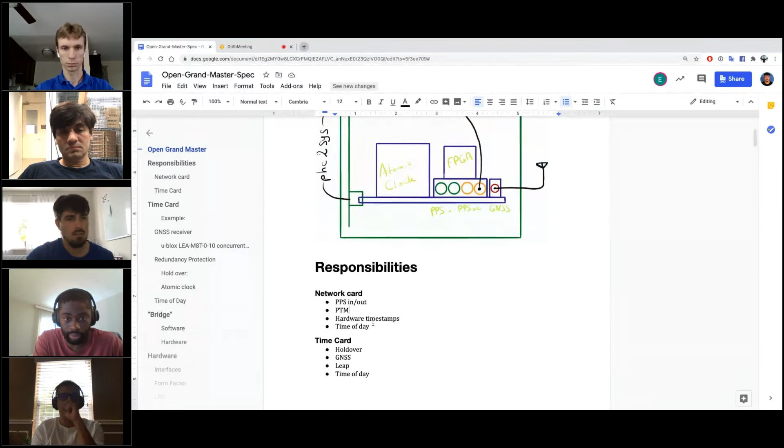Because it's connected with PCI Express, it exposes itself as the hardware PHC clock, so it will provide time of day. Usually it's /dev/ptp0, for example, on Linux, and you can read time of day easily from it. On the time card side, it must perform a holdover. That's why, for example, here is an atomic clock. It has a GNSS receiver to get time.

It has an FPGA to handle basically being a bridge between the GNSS and atomic clock, and perform some functions like leap second not smearing, but propagating. And it should also expose itself like a PHC. So it should have an interface to get and maybe even set time of day externally through open source utils.

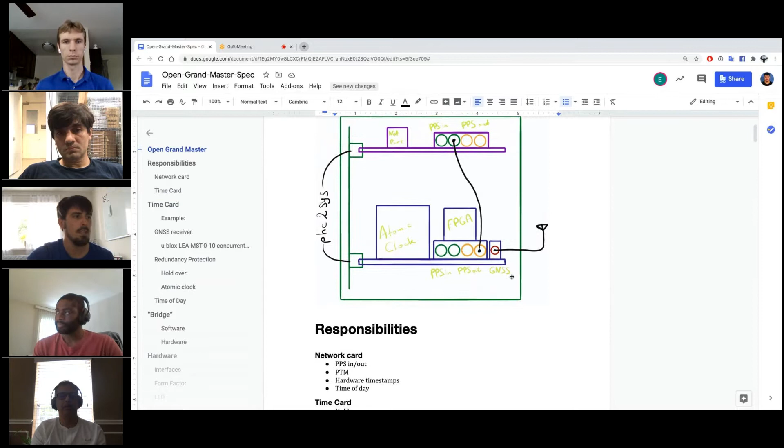Okay, so now we more or less figure out a general picture of how it looks from outside. The idea is that this setup is easily buildable. My favorite example is a researcher in Siberia. If this researcher doesn't have money to buy a very good, expensive network card, for example, which doesn't have a PPS in, they still can enjoy open source tools like phc2sys to copy data from the time card to the network card.

There is open source software which handles this, and they still enjoy not extremely precise, but pretty good precision. Which is fine for research purposes, maybe for development of software, for many other markets. So basically a long tail of markets will be covered just by using the software copying of the clock.

And if you want extreme precision, like we do, you just have an extra cable which leads the PPS output of the time card to the PPS input of the network card, and this brings the precision to crazy numbers, and we expect them to be less than 100 nanoseconds.

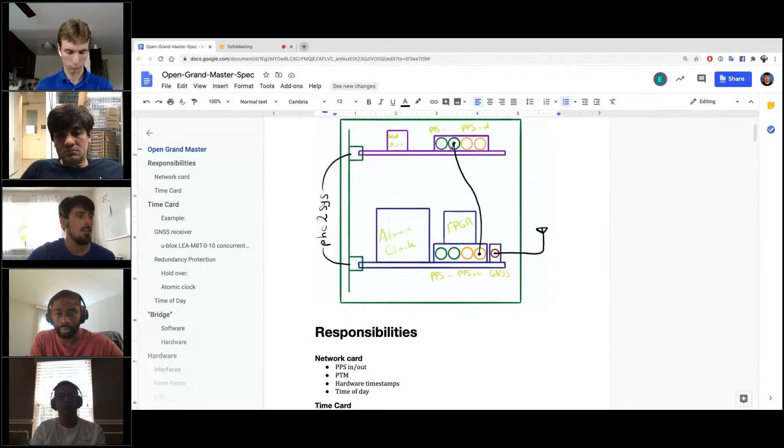So we went through responsibilities. Then we go a bit deeper into the specification. As I mentioned already, the time card itself should expose itself as /dev/ptp-something. There should be open source tools like ptp4l easily working and accessing this information.

And additionally, this should provide precision of less than 1 microsecond. And if we want extreme precision, we plug 1 PPS and it gives under 100 nanosecond precision. In our experiment, it's actually single or maybe double digits of nanoseconds in the worst case. So, right. This is about the time card.

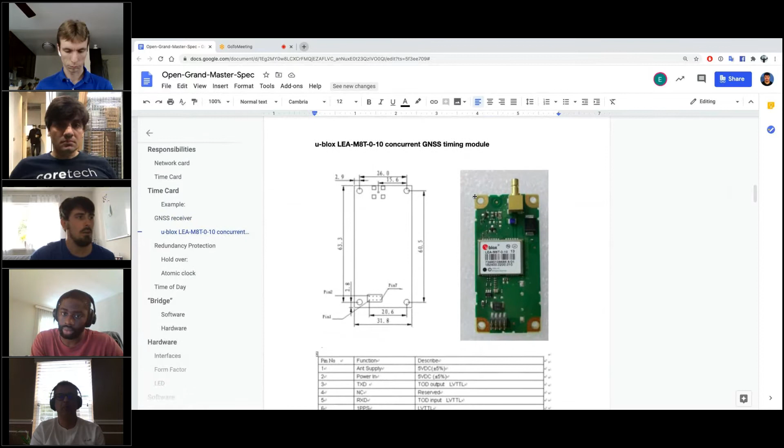One of the inspirational examples might be the card from Microsemi, which they were selling a long time ago, but it doesn't have many features which we discussed right now, so that's why we cannot use it. Obviously the GNSS receiver could be just purchased anywhere. It's u-blox, nothing super special about this. It should just provide several interfaces, like time of day, 1 PPS, etc.

And for the holdover, there will be an atomic clock or any other substitution, maybe even a very good temperature compensated OCXO, so it should be fairly pluggable. It should be abstract, we should have abstraction from it. And the bridge I mentioned could be built in multiple ways. It could be a so-called software bridge, where the software does the job. Then it requires GPSD, etc.

This is like a just-in-case approach. We don't want to go with it and don't want to spend too much time on it. We're thinking about a hardware approach, so a hardware bridge between the atomic clock and GNSS. So our sketches look more or less like this.

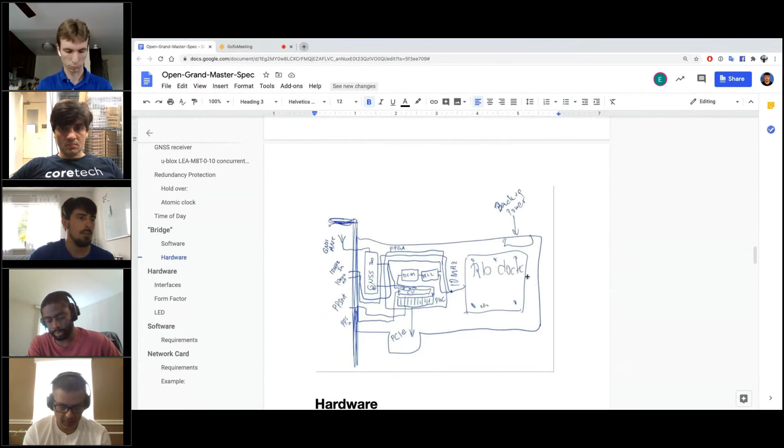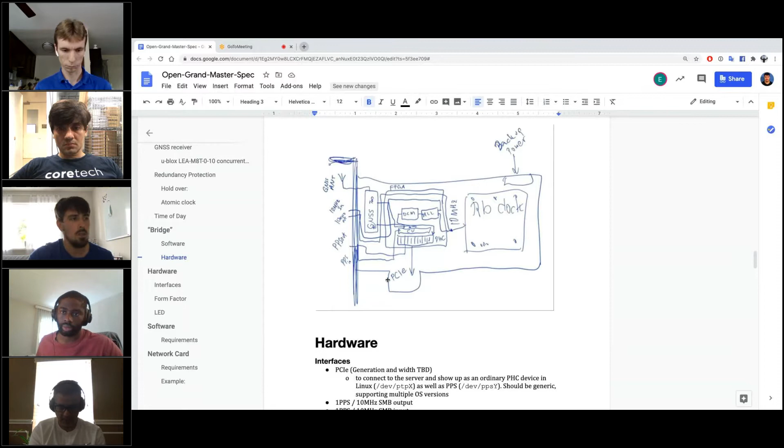We have some metaphorical PCI Express card with some outputs and inputs. Then you have a rubidium clock, for instance. There is an FPGA. You plug it in. And this is basically an add-on to have really great precision. So there are some interfaces described here.

In our case, we go with PCI Express, PPS in and out, SMB connectors, GNSS antenna, and if we merge functionalities of the network card, it might actually have a network port as an optional add-on. Right, so it should have LEDs to signal the status on it, obviously.

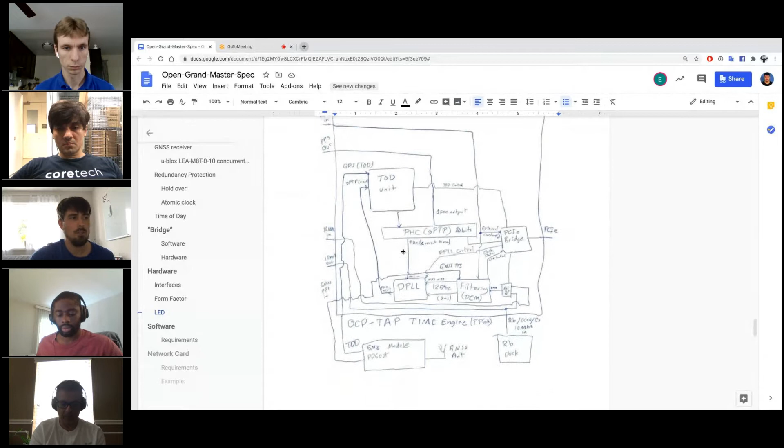And yeah, this is a deeper dive into how the FPGA works. I don't want to stop too much on this at this moment. Right, so the software running on the server, which will facilitate everything working as expected, should be a standard Linux or Unix-like descendant of Unix operating system.

It should be visible, so there has to be a small driver, something very generic, which can expose the registers of the time card and map them as a PTP device, and PPS as well. And this is very small. The need for it is because there are custom registers depending on what FPGA is used, so you have to have those registers written somewhere.

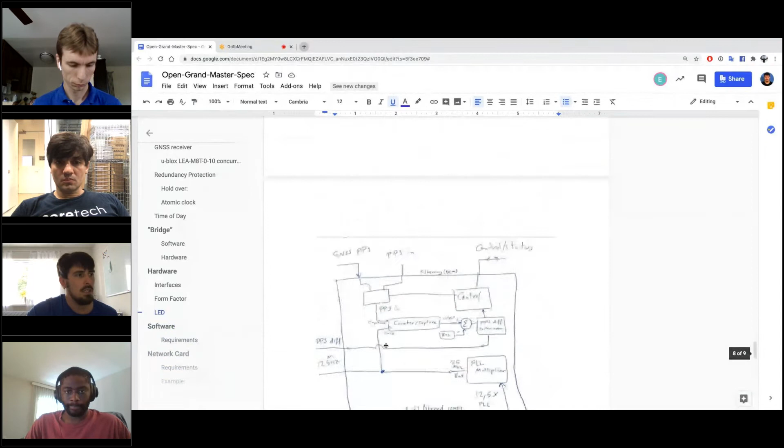So PTP4L is running, and it's using features of the network card like hardware timestamping, etc. For NTP, Chrony can be used, for example, which also can read the PTP device to become the NTP server. And the network card's requirements we already mentioned. We work closely with NVIDIA and Mellanox, so we are talking in this case about ConnectX-6 network cards. Right, so with this I can give a word to Dotan, who can tell a bit more about the network card component of this setup.

Hi, if you can leave the slide on, I'm going to talk about this slide. Oh, okay, sorry.

So I want to explain another huge motivation that we see with that open design. Essentially our goal and aspiration is to introduce time sync service into a data center, to make it commodity, to make it easy to use. Oleg mentioned his friend in Siberia, and we all have friends. Time sync is not something that is easy to deploy in data centers. It requires all the operational infrastructure to be cooperative.

Now, when it comes to the Grandmaster, this Grandmaster contains networking functionality, it contains accuracy functionality, and it contains what is hidden inside the PTP profiles, which is industry specification for packet format, for specific points of accuracy and cost, etc. And with that design, we divide those three components, and we just ride on the commercial trains that go as fast as they can.

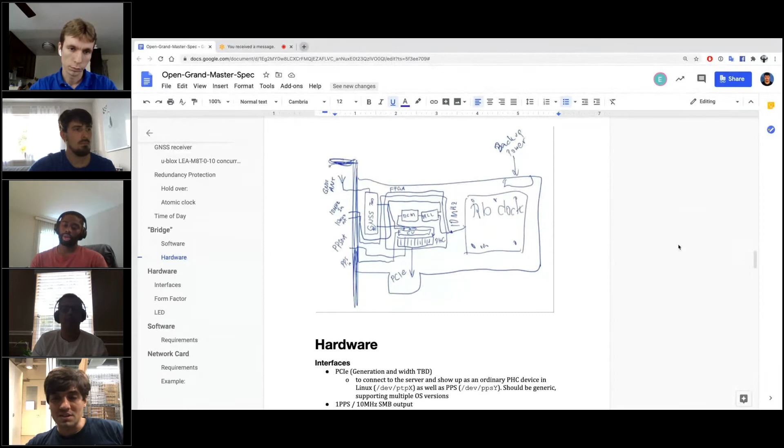We're just giving a suggestion, where basically the FPGA is acting as a bridge to communicate via PCI Express. You have GNSS and a rubidium clock on two sides, and then you have the 10 megahertz input/output and the PPS input/output. Both can be presented on the front of the card with an SMA connector, or with an IPX connector on the board if you want to keep everything inside the board. Let's scroll a little bit down.

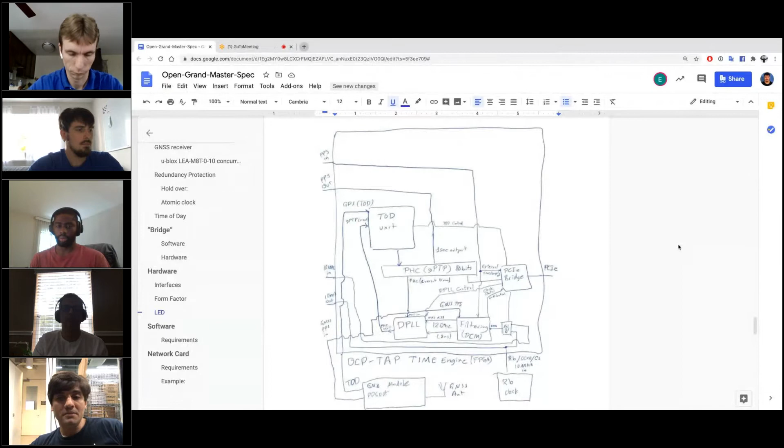In terms of the overall block diagram of what we're going to have in the FPGA, we're thinking pretty simple. We have the bridge showing up here. You have a PHC with a gPTP protocol, 80 bits, and then you have the DPLL. For example, we're talking with some other colleagues about externally creating the PLL with a VCO, feeding the VCO with a high precision DAC, and feeding that back in.

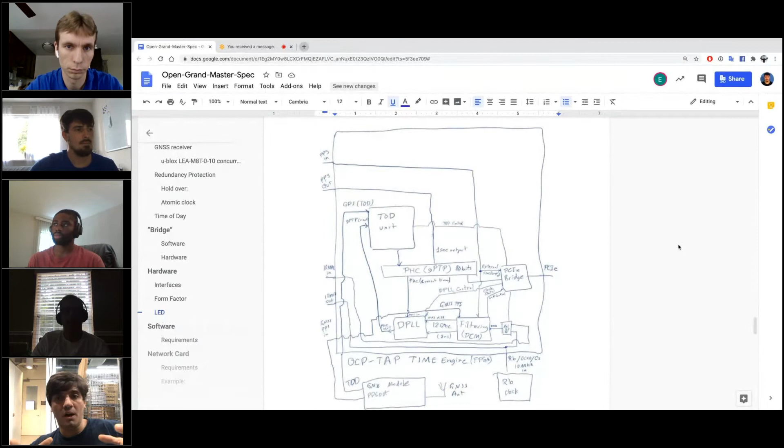This is just a suggestion, and for this quote unquote suggestion, at the same time as we develop the hardware, the FPGA code, IPs and everything, we'll also develop the PCB for it. We'll have the BOM and the schematic available as we go through. And then let's go next.

So basically what it boils down to is you have the atomic clock or OCXO, or a cesium clock or hydrogen maser, whatever you have. You feed that in, and you have your counter running the beats with your atomic clock, and you're taking snapshots from the GNSS that you get in. Then you see how far they are from a second, and you use this to tweak your VCO or PLL. This is called disciplining your oscillator.

Once your GNSS or GPS is gone, you can heavily rely on your atomic clock that you already disciplined in the presence of GPS, and continue on. You can provide all sorts of control schemes, more aggressive or soft, depending on the application. If an application needs more reliability, just add another PPS input or another GPS GNSS receiver, and now you have redundancy. You can add a second atomic clock for redundancy on that side.

For all these ideas, we want to have something that you can either tweak, or more like off-the-shelf hardware you can take and continue from there. I'll leave it to you to continue. Yeah, that actually summarizes it very well. Right.

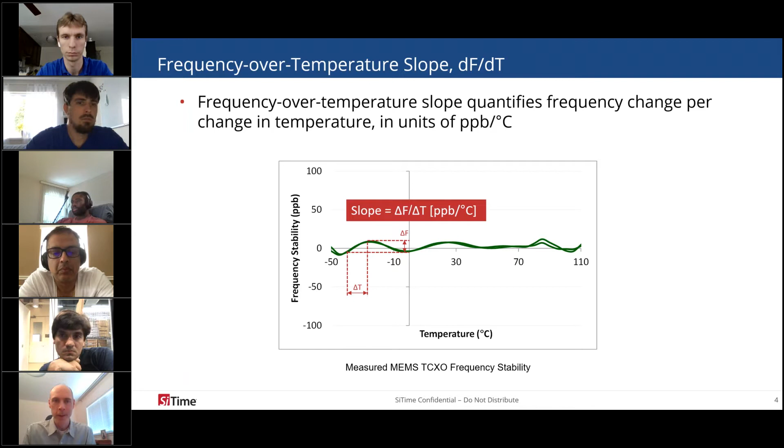An ideal curve would be a horizontal line centered at 0 on the y-axis, meaning that the output frequency doesn't change with temperature. But in practice, of course, DFDT is not 0. And when evaluating a precision oscillator, the most advertised specification is frequency over temperature stability in units of ppm. People sometimes just refer to that as stability because it's so common. For example, people will talk about a 1 ppm oscillator or a 0.5 ppm or 100 ppb. This is the frequency over temperature stability, and it's the first thing people typically think of when selecting a precision oscillator.

However, because in PTP applications the local oscillator is disciplined to the network timing, any frequency changes in the oscillator that are slower than the servo's update rate get filtered by the servo loop, because the oscillator is high pass filtered. Thus, an oscillator's frequency over temperature spec, which is guaranteed over the lifetime of the oscillator, isn't really a critical parameter here. What is critical is the short-term stability resulting from changes in temperature. And by short-term, I mean the time between servo loop updates,

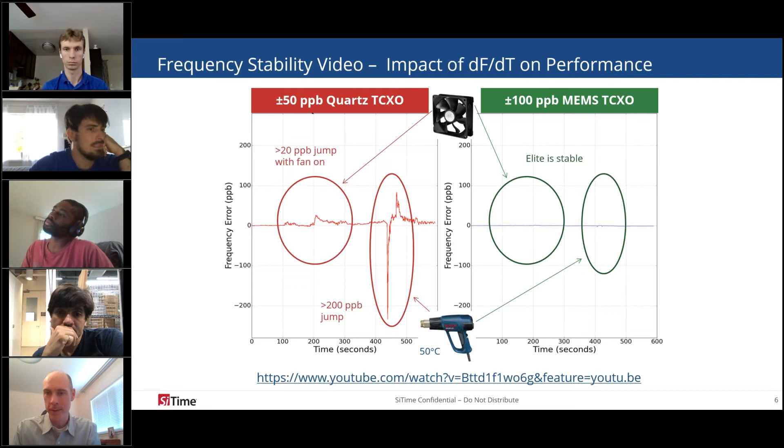But in the interest of time, I'm going to skip this video in favor of a different video that creates a PTP network with 2 slave clocks locked to the same upstream PTP master and plots the time error resulting from changes in their thermal environments. The principles are exactly the same as the last slide, but I'm just going to show this video here because it's within the context of PTP time error.

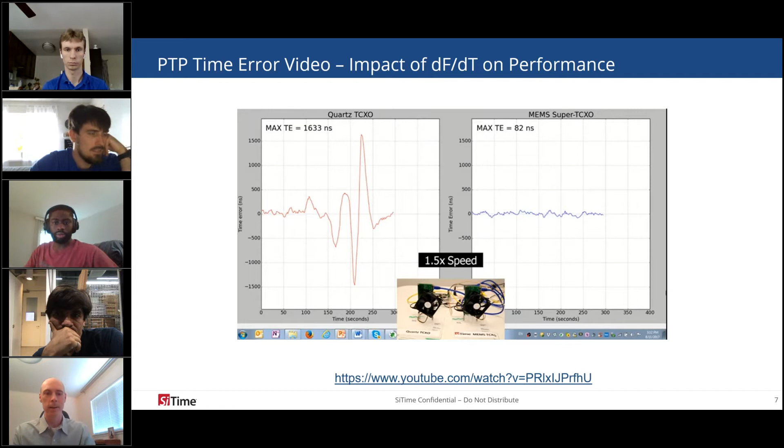Gary, if you can go back to slides. Okay.

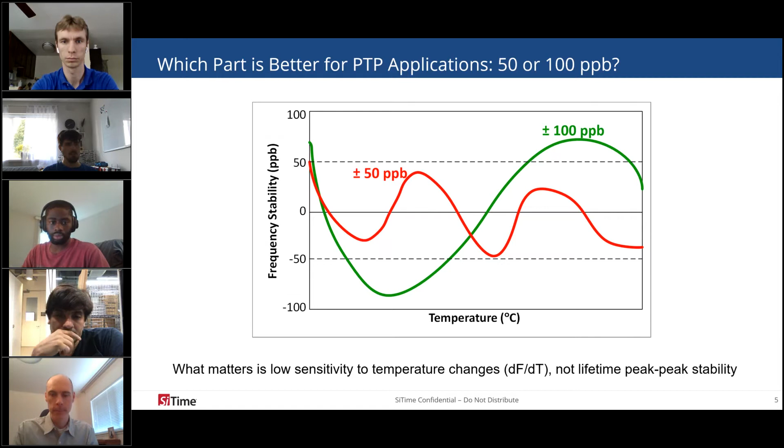This one? Yeah, so actually you're presenting here the one with the fan, with the blower, this one here. So it might seem like a weird situation where you come with a blower and change the temperature, but in data centers, this is an actual event. When an operational engineer opens the rack for maintenance, the temperature goes up. It's not similar to climate change, which happens slowly. Data centers do have spikes.

And by the way, oscillators do respond to acoustic noise as well. I have often seen controlled oscillators that were affected by just the noise created by a fan. Yeah, vibration can also have an impact, although I'm not talking about it specifically here, but yes, vibration as well. Yeah, we've seen cases where some of the racks have a baffle in the front, and that'll impact the way that the temperature flows through the rest of the chassis and create kind of strange effects.

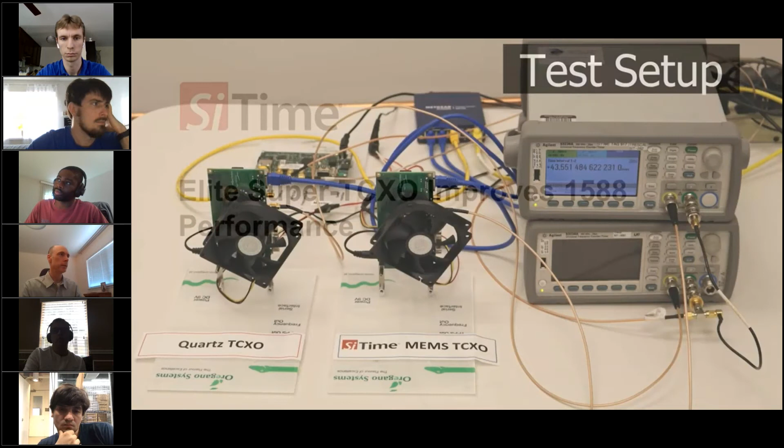Was there any other comment you wanted to make on that? Should I show the video next? Yes. Okay. So let me go ahead and show that. This is a very short video. I think you can see it. Let me know if not. I'm going to start it. It's at an advanced speed here. So let me start again so I can sort of narrate it.

So this is looking at our TCXO performance for 1588, and the first thing is that we have this.

Pause it. So we have 2 boards. One of them has a Quartz device on the left, and one has a MEMS TCXO on the right. They each have fans in front, which we're going to turn on in the video, and they're locked to an upstream master in a PTP network. And we're looking at the frequency through a frequency counter, and we're going to integrate the frequency change to get to phase and convert that to time.

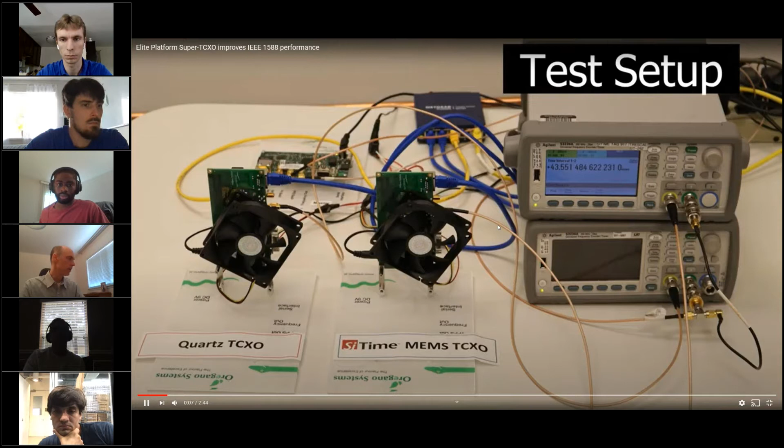So on the left board we have Quartz, on the right we have the MEMS device. I think in this specific demo, we have compared exactly PPS signals from the master, grandmaster, and the slave card. So it shows you the exact measurement of difference in PPS timing. Okay, thank you for that.

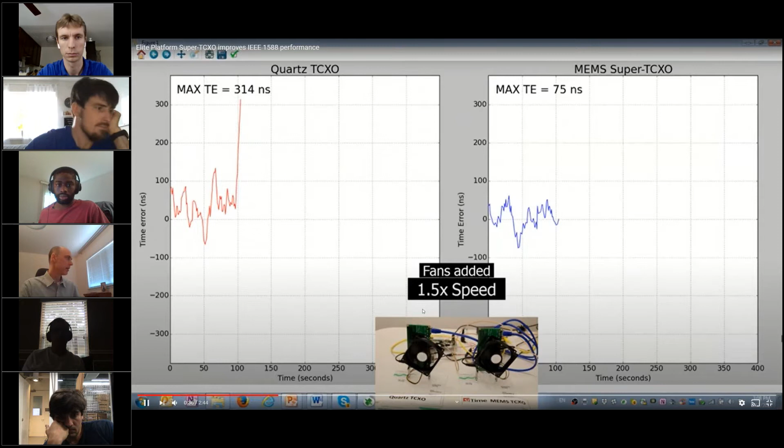And so here we're seeing the time error on the y-axis, on the left for the Quartz, and the right for the MEMS. And you're going to see the fans turn on, which they just did. And on the left side, you see the reaction in the frequency change and then the time error for the Quartz-based device, and then the MEMS-based device doesn't really change. And in a minute, you're going to see a hand reach in and show a hair dryer blowing on the Quartz device. Okay, so the fans stop now, and here comes the hair dryer.

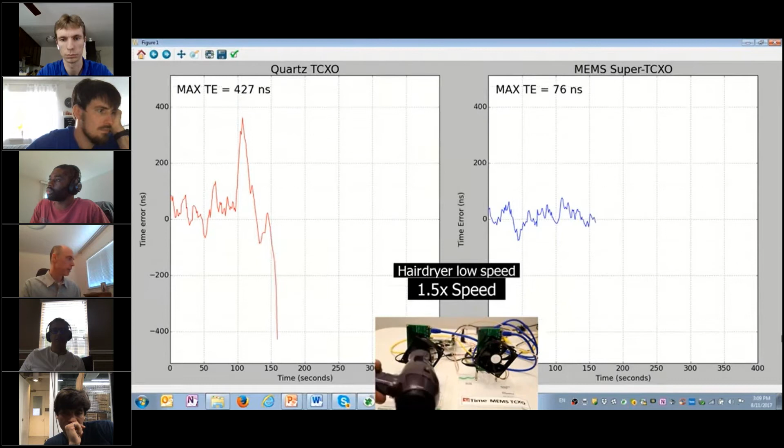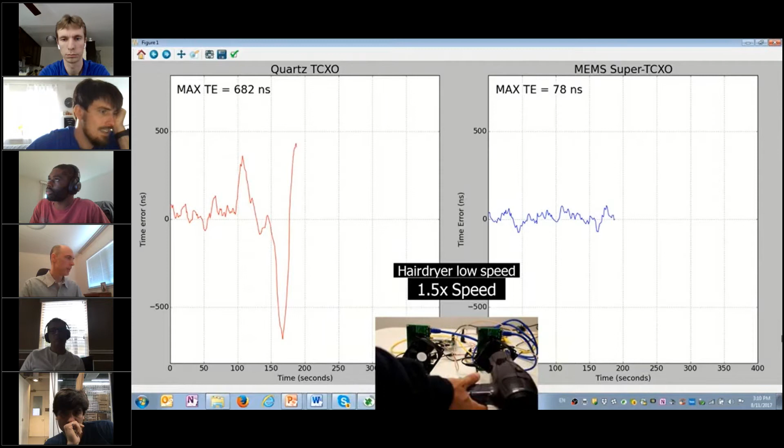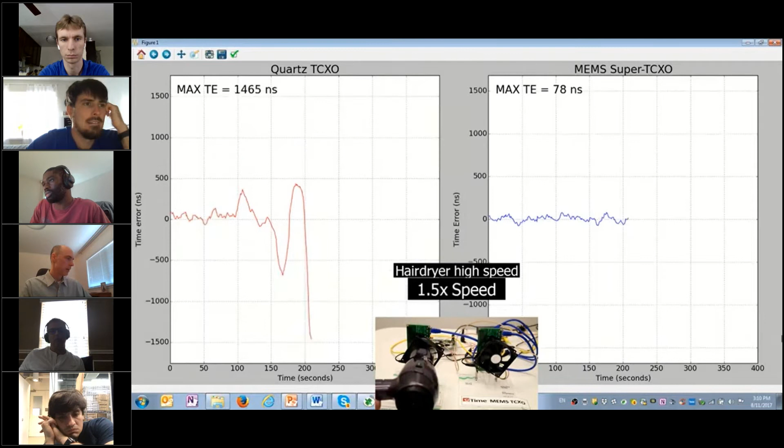It's on a low setting at first, so it's just a little bit of heat, and you can see the deviation in the time error that causes on the Quartz device, and now it's shining on the MEMS device, and there's really not too much change. And next, we're going to switch it from the low-speed hair dryer to the high-speed, and so you're going to see a greater deviation on the Quartz side, and on the MEMS side, it's not going to change much.

And the Quartz takes some time to stabilize, and that's because of the lag between where the temperature is sensed and where it should be sensed in a Quartz device. And so this video plays out. The left one is stratum 3.

You're asking about the stability of the left one? Yeah. Do you recall that one, Zara? I don't recall. This video is a couple of years old. So the parts are the same as in your slide. So the left part is the 50 ppb Quartz TCXO, and the right side is 100 ppb frequency stability MEMS device. So those are technically better than Stratum 3 because Stratum 3 is like 250 ppb.

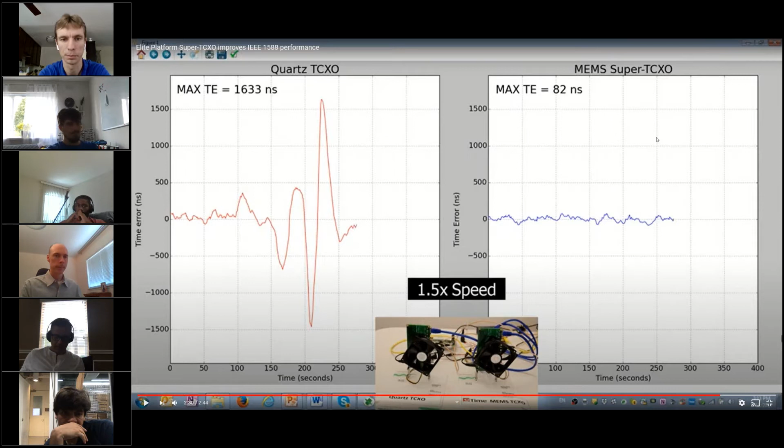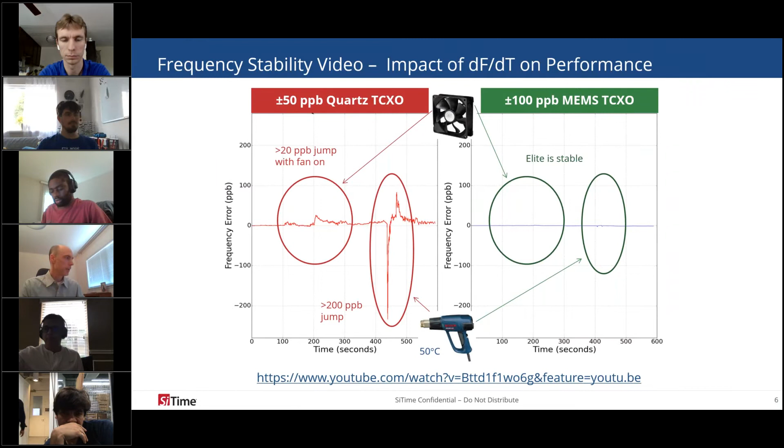Okay. So that's a kind of illustration of the physics. And now I want to try to explain why we're seeing these results. So where we want to sense temperature in the Quartz device is on the Quartz itself, but the sensor is located physically separate and below the Quartz. And this is going to create a thermal lag that we observed in the thermal gradients. In addition, the way the correction is applied, the device can only track very slow temperature changes.

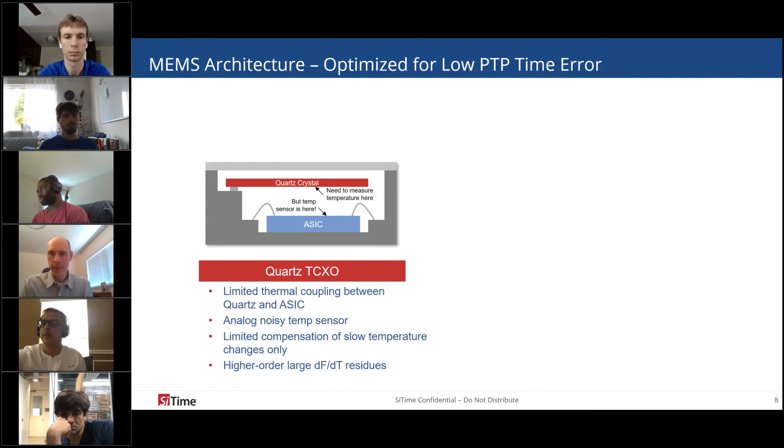I mean, not intentionally. It drives the FRAC PLL in order to synthesize the desired output frequency within a range of 1 megahertz to 220 megahertz. And frequencies from both resonators are fed into a temperature to digital converter circuit that's used by the PLL to compensate for changes in temperature.

Because of where the temperature correction signal gets injected in the PLL loop, which is specifically in the feedback divider, the loop is able to track changes in temperature 40 times faster than Quartz devices. And that relates to the good performance that we saw in the video.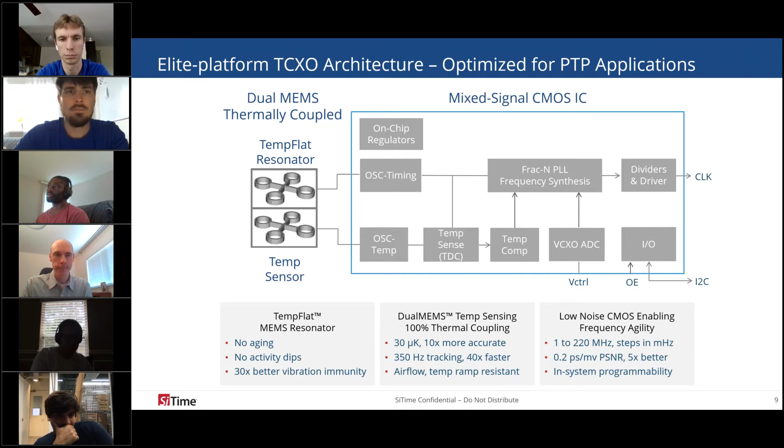So in conclusion, the take home, yeah. Hey, this is Chris McCormick from Epson. Can I clarify quickly? It seems that the advantage that you're showing, if I'm summarizing you correctly, is due to the compensation circuit and the location of the temperature sensor, but not an inherent weakness of Quartz. Would I be summarizing you correctly there?

Yes, that's what I'm trying to illustrate, the physics that led to the better results. In this architecture with the Quartz, that's what we're seeing. If there's other architectures, then of course, it all relates back to the physics of it. Does that help you, Chris? Yeah, thanks for the clarification.

I'd say historically, there's been some poor choices made in terms of the compensation and temperature sensor location with respect to the resonator. And as a Quartz vendor, that's not something that's inherent to Quartz itself. So there are improved designs from what is being shown in this presentation. Just wanted to clarify. Thanks. Okay.

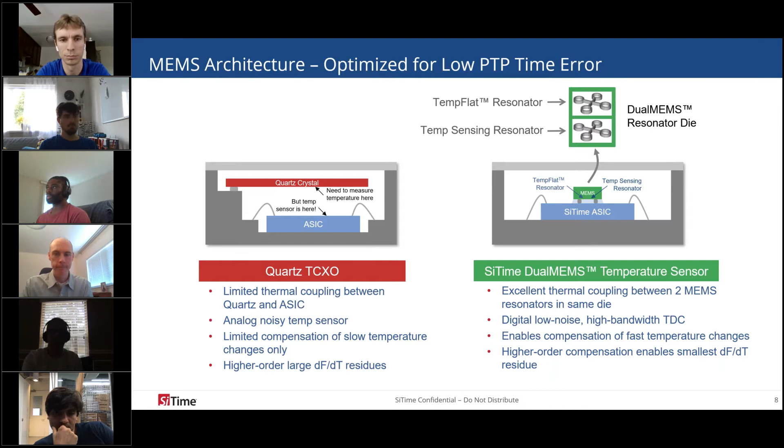All right, so in conclusion, the real take-home point is that you can't judge PTP performance by a precision oscillator's frequency over temperature spec alone. The frequency slope over temperature, or the DFDT, plus your system's temperature profile both greatly influence the maximum observed time error.

Stated in a different way, oscillators with the same frequency over temperature stability can have significantly different DFDT performance, and thus PTP time error. So we presented this dual MEMS TCXO architecture that we designed to be optimized for synchronization applications, including PTP.

So Gary, if I may add, typically all of the precision oscillators, the way they're specified in datasheets, is targeted for telecom boxes with a very stable environment. And what we've seen is oscillators characterized for temperature ramps not faster than 0.5 degrees C per minute or 1 degree C per minute, which is a fairly slow temperature change.